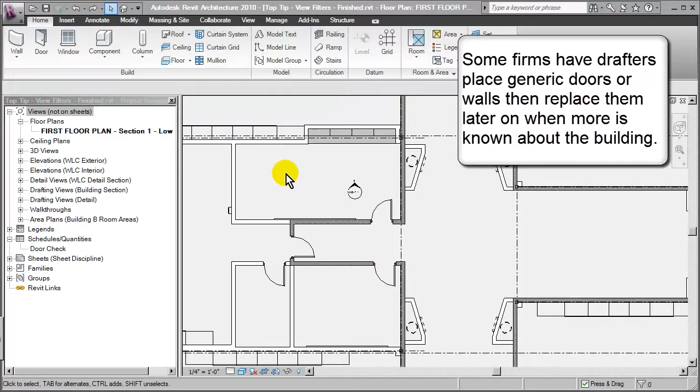Now here's the situation. When we're first working in Revit and creating our walls, doors, and windows, there's usually quite a few details still up in the air. In fact, at some firms there's a drafter who first places some of these elements, and they may not really know what sort of details or door are ultimately going to be used. There may be someone at a later stage, a designer, who reviews these details.

For example, when I select this door, I'll go up into its properties. I'll select the door, go to Element Properties. Here we see all sorts of different parameters applicable for a door, such as which side the push is, which side the pull is on, whether there's a closer, what sort of door frame, material, fire rating, etc.

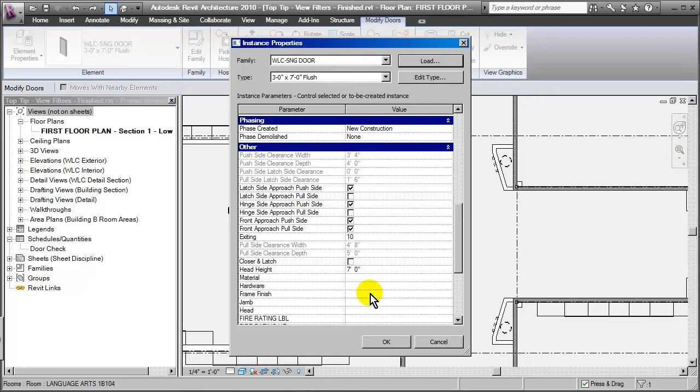So a lot of times we'll insert the door and not worry about these elements, but we do need to worry about them at some later stage. Let's say a drafter has put these doors in without giving too much thought to those details. Once the project gets handed off to me and I have to detail out the doors, I want to see which doors have been finished and which still need my attention. Ultimately, this is what we're going to get to with this tip.

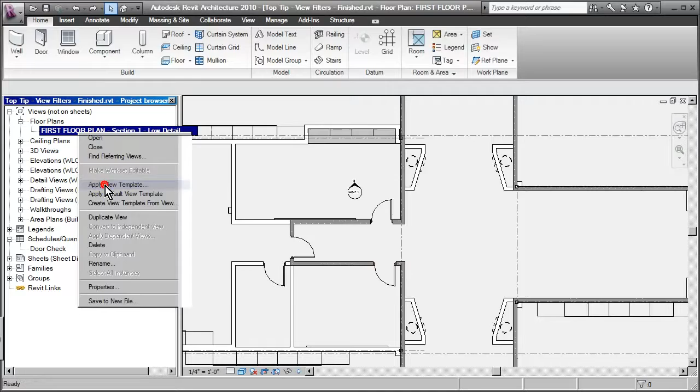Watch how easy this is to differentiate a door that's been checked from one that still needs to be checked. I simply go to my floor plan, go to view templates, and apply a view template I've created named Door Review. I click OK, and you see this now color codes some of the doors, but some are still their natural color. So here we can see that the doors that are red are the ones that still need my attention.

Let me demonstrate how we created this scenario with view templates and filters. Let's go back to just the beginning drawing. What we want to do is create a parameter specifically for these doors that indicates to Revit whether that door has been checked or not.

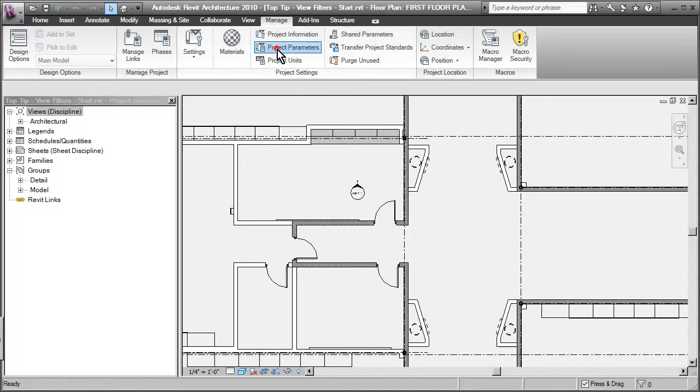So we go up into the ribbon, go to the Manage tab, and create a project parameter. I'm going to name this project parameter Initials. Now I could have just called this Checked or Unchecked, but I chose Initials so we can put our initials into the field, giving a little accountability so I know exactly who reviewed this door. We'll group this under Other, apply it to the doors, and click OK.

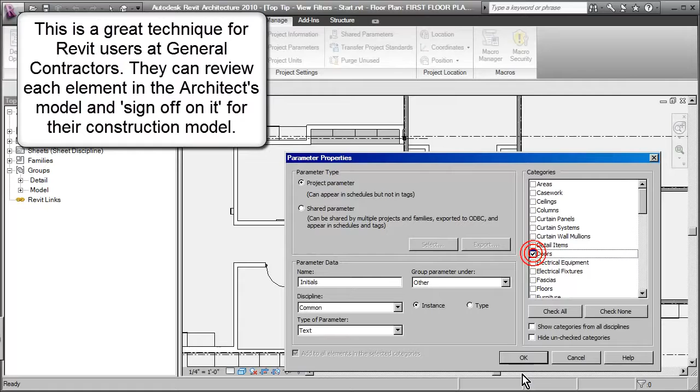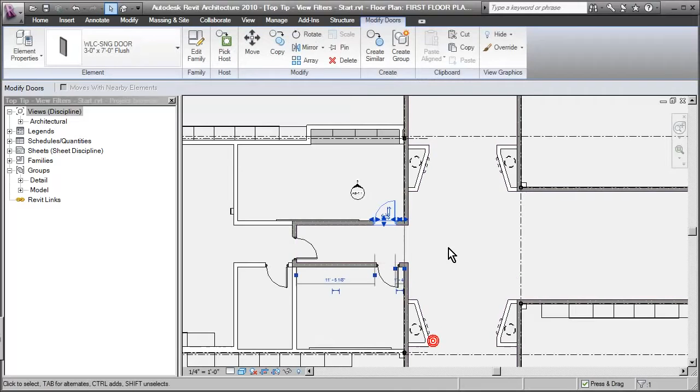Now if I select one of these doors and go to Element Properties, down into the Other category at the bottom, you see there's now a parameter for Initials. We don't just want this to be a blank field, we actually want it to say Not Checked. So to do this quickly, we'll select everything in the project, go to our selection filter, filter out just the doors, go to Element Properties, go to Initials, and type in Not Checked.

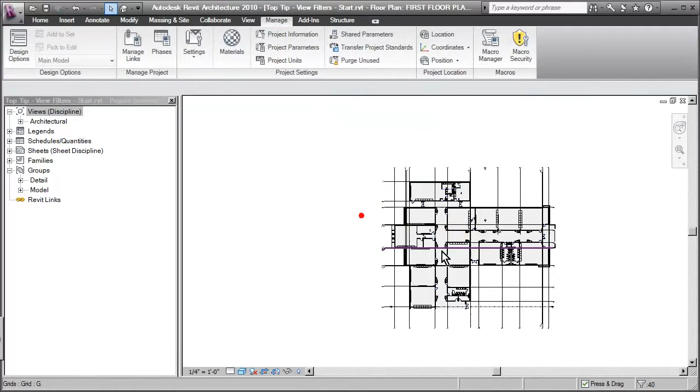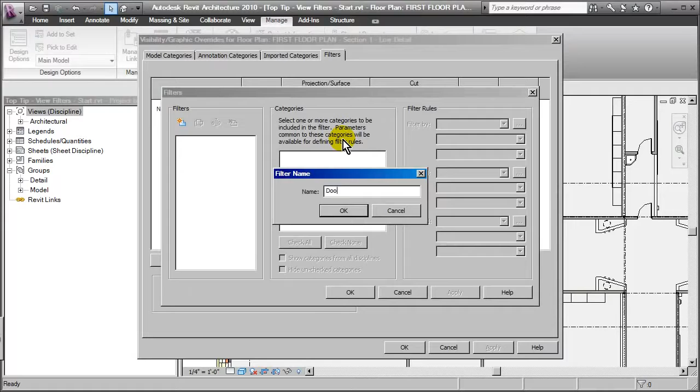Simple enough. So now what we want to do is go into our visibility graphics. I type in VG to bring up visibility graphics. We'll go to our filters, and we want to define a new document filter. Click the new icon, and I'll call this Doors Not Checked.

So we'll go through and we'll filter out all the doors that have an initials parameter that is equal to Not Checked. Okay? So doors, filter by this parameter. If it's equal to Not Checked, then this filter will be in effect.

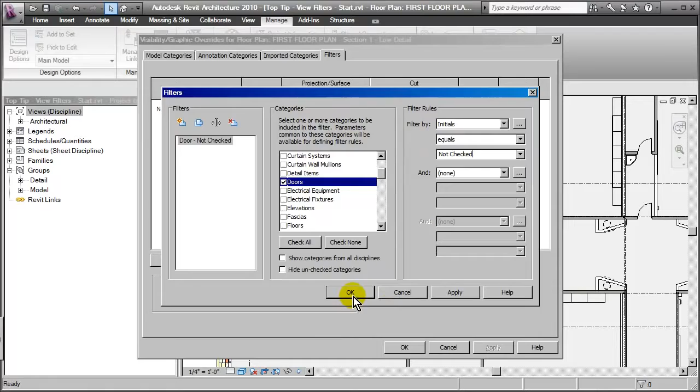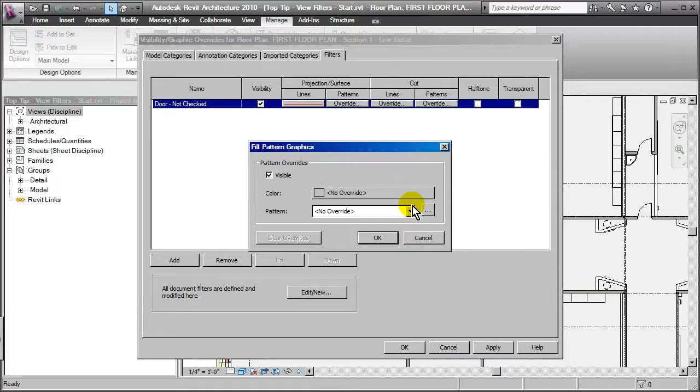Back in Visibility Graphics, we want to simply add the filter that we just created. So any doors that meet this criteria will have these overrides applied. So now I'll just go through and I will change the color of the line work to red, and also for the patterns we'll set this to a solid fill, like so.

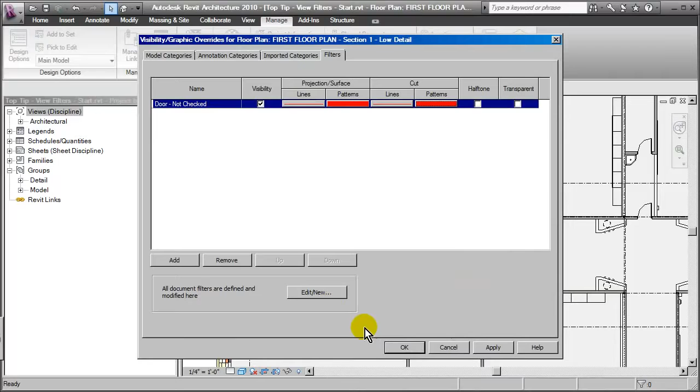I'll do the same thing for the cuts, just to be on the safe side, just so that all of our doors are consistent. Set this to red, set the pattern to solid fill. So here's where the magic happens. As soon as I click OK, see what happens to the doors. Every one of the doors in the project turns red because they all have that property set for initials. It's just set to not checked.

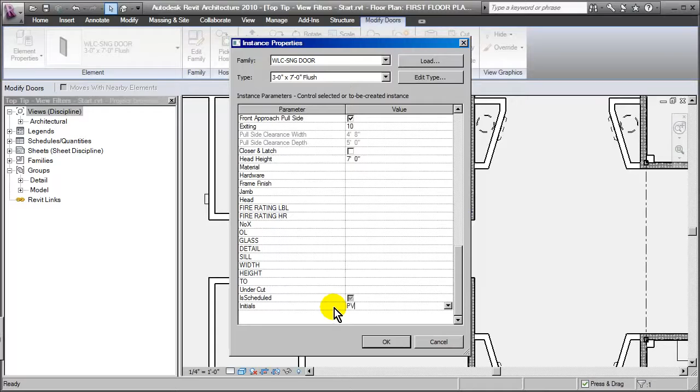So now I can go through and I start to review the doors. I go to their element properties and I start to establish what sort of hardware I want, whether it has a closer, etc. As soon as I've gone through that review process, I want to now just replace the value in initials with my initials. Click OK, and as soon as I do that, you see that the filter is no longer in effect for that door, so it changes back to its normal color. Very cool, huh?

So the last thing that I recommend doing is go ahead and save this view configuration as a view template. So simply go up into your floor plan that's in effect, right click, we will create a view template from the view, and we'll call this doors, or let's just call it door review.

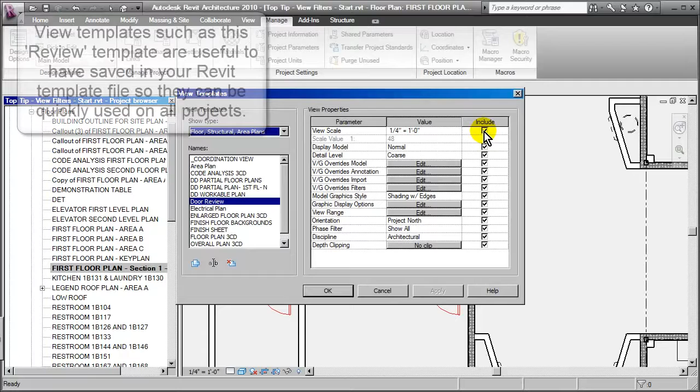Now, you could just go ahead and accept the defaults. You may want to go ahead and uncheck a few of these just so that it doesn't interfere with a scale that you may already have for a particular floor plan. You can uncheck all those. Really, the only ones we're concerned with have to do with the visibility graphics overrides, so we could just uncheck quite a few of those.

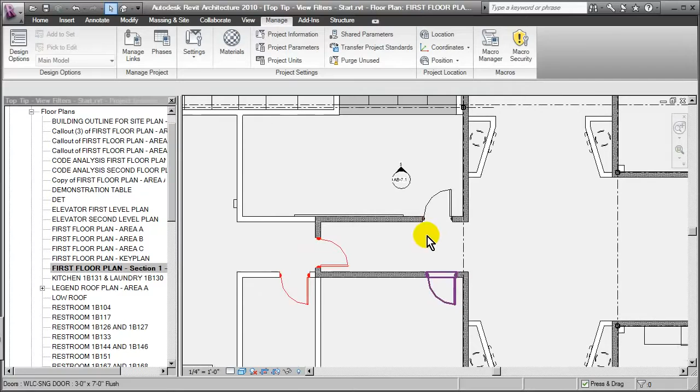Click OK. So now whenever we want to do some sort of a door check, you simply go over, right click, and you say apply the view template and apply the door review template. I'm going to jump back over into that other drawing really quick, and I just want to show you one last thing. I've created a door check schedule.

If I view the door check schedule, very quickly we get a list of every one of the doors and we can see which ones have been checked and which ones have not. We can also see the initials of the person who has taken responsibility for the details for that door.

So I really hope that this tip has sort of gotten the gears spinning. I think you can find all sorts of different things that you could do with these view filters. Very, very useful to take advantage of the information that's inside of your Revit model to be able to make your job a little bit easier.